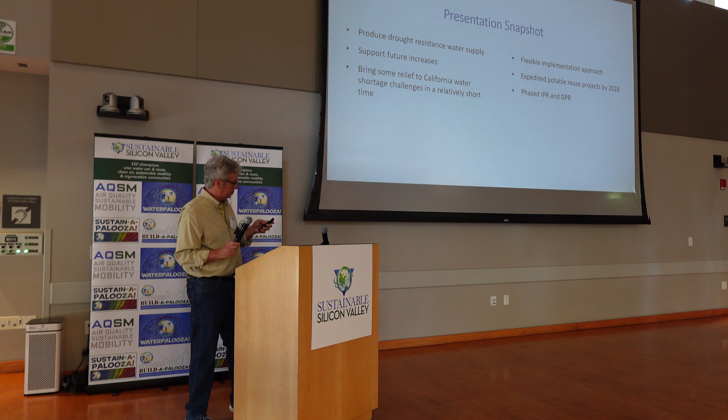Okay, so this is me. So we are Silicon Valley Clean Water. We are a joint powers authority, which is why I happen to have the title Authority Engineer—it's the chief engineer or district engineer, but we're not a district, we're an authority. So we are a JPA, and we do the wastewater conveyance and treatment for Belmont, San Carlos, Redwood City, and West Bay Sanitary District. They own and operate their own sewer systems. We collect the flow from the low point of their system, pump it to our treatment plant, and treat it for discharge into the bay or into recycled water for the city of Redwood City.

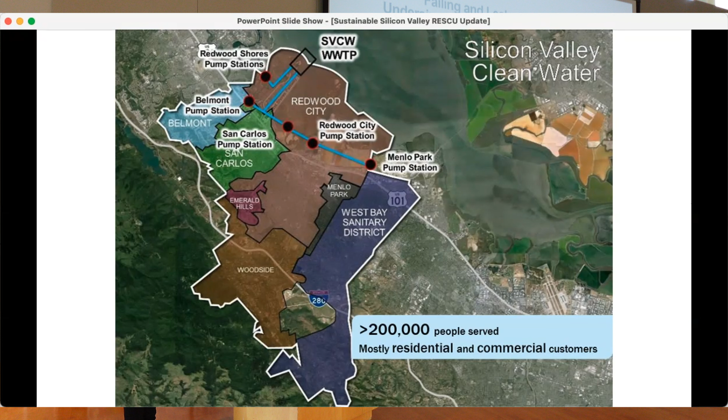So I'm here to talk about our conveyance system, and these pictures are of our failing force main. The force main, the pipeline that takes flow from each of our member agencies to our treatment plant, was built in the late 60s. We needed to operate it at a higher pressure than it was designed for in order to get the flow to our treatment plant, and we experienced several leaks in the system.

For a while it was cost effective to send operators out the entire length of our force main every other week, looking for evidence of a leak so that we could quickly address it. We would have two leaks a year in the 2000s.

It got to a point where we knew we needed to replace our force main, as well as upsize and replace our pump stations that pump the water to the treatment plant. So Dennis mentioned that putting pipes in the streets might be more difficult than convincing people to drink potable reuse, and that may be true, because it's disruptive, it's expensive, but it's a necessary part of life.

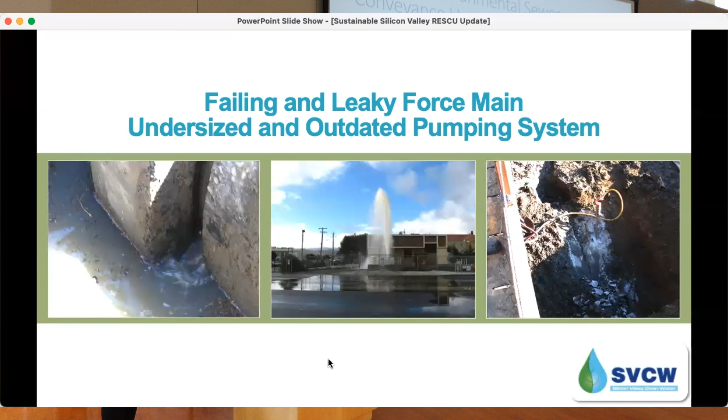So we underwent what we call our RESCU program—and every good capital improvement program has an acronym. We are Regional Environmental Sewer Conveyance Upgrade, RESCU. Ten years into the program, and I still have to look at the words to tell you what the acronym stands for, so it's written out there for my benefit as well.

So this is the extent of our conveyance system. We have one pump station for each of our 4 member agencies, and right now a force main that connects them all and brings flow out to our treatment plant at the end of Redwood Shores. In looking at this program, we split it into 3 separate projects. The first is our front of plant project, which includes a headworks and a lift station that can bring the flow up from underground to the surface for our treatment plant. The headworks is actually a typical process at a wastewater treatment plant.

It removes big materials, sand, grit, rags, baby wipes, lots of things that people flush that we'd rather they not, but basically protects the remainder of the wastewater treatment plant. Our treatment plant was designed without one, and since it's been in operation since the early 80s, we've operated without a headworks, but we're really looking forward to having a headworks in front of our plant.

The big project is our gravity pipeline project, and that's this green line. So what we did through our planning process was really look at all of the options for conveying water to our plant.

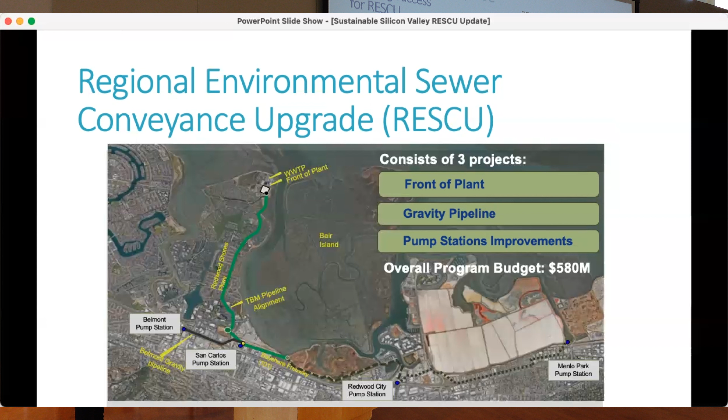So I want to just talk a few things about the program. At the beginning of this program, we set up some success factors under the categories of cost, operations, maintenance, safety, schedule, and stakeholders. Stakeholders was kind of a big category for the public, the environment, the regulatory community. And that was a really important key towards getting our minds straight, setting our North Star, figuring out how we were going to make our decisions as the program went on.

I also want to highlight that partially due to very good timing and partially due to very hard work by our finance department and the finance departments of our member agencies, we were able to take advantage of very low interest loans to be able to fund the majority of the program and reduce our financing costs on behalf of our member agencies.

Another thing that's different about our program is that we use progressive design build construction methods for our projects. That's a process where you bring the contractor on board during the design phase, very early in the design phase. They're involved during the completion of the design and then the construction project.

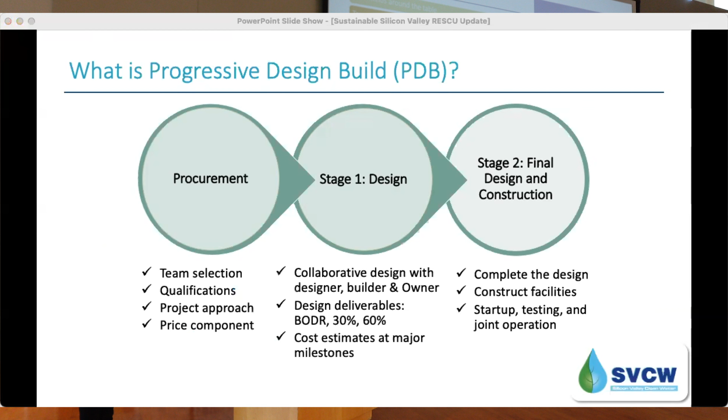We did that for a lot of reasons. For this program, first, there are so many smart contractors out there, so many good contractors out there that they get a set of plans and they go, I can't believe the engineers thought we could build it that way - let me tell you how we're going to build it. So to be able to have that input early in the design process, the input of both the contractors and the contractors' estimators, really helped our decision making in terms of how much the decisions we were trying to make were really going to cost us in the end.

This is a very transparent process, very good in complex projects, gives us cost certainty and schedule flexibility. There are a lot of good reasons that we chose that approach.

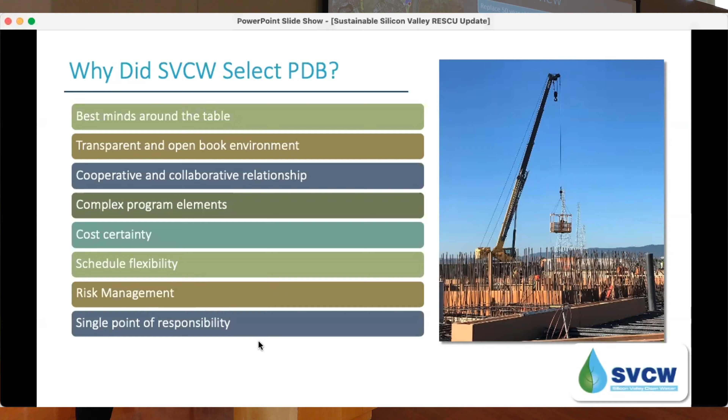So the stats are, it's about 3.2 miles of tunnel, 16-foot diameter, 16.5 foot diameter TBM. What we did was we launched it here from near San Carlos Airport and took a first pass this way towards Inner Bair Island. At the end of Inner Bair Island, we pulled it out, put it back in here, and then went the rest of the way down to the treatment plant.

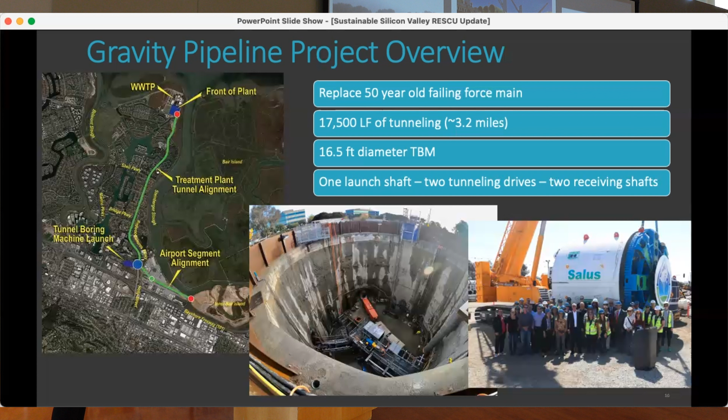Inside the pipeline is an FRP, fiberglass reinforced polymer pipeline that's 10 and 11 feet in diameter. It was manufactured in Indonesia and shipped over here, and placed inside the interior of the tunnel.

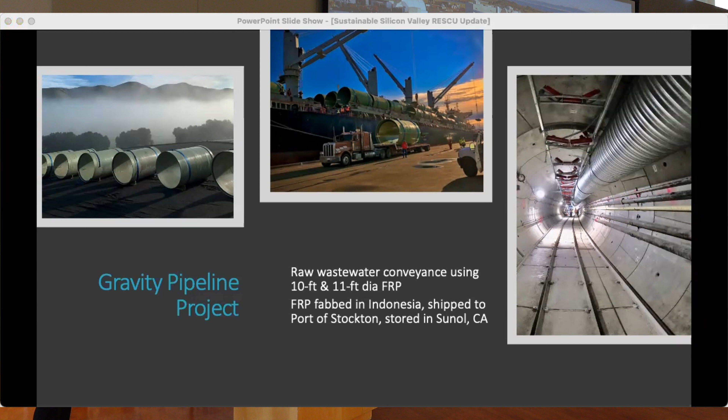Our front of plant project is a deep, large lift station that pulls the flow out of the deep tunnel and into our new headworks, which provides screening, grit removal, and an odor control process, becoming the first process of our treatment train.

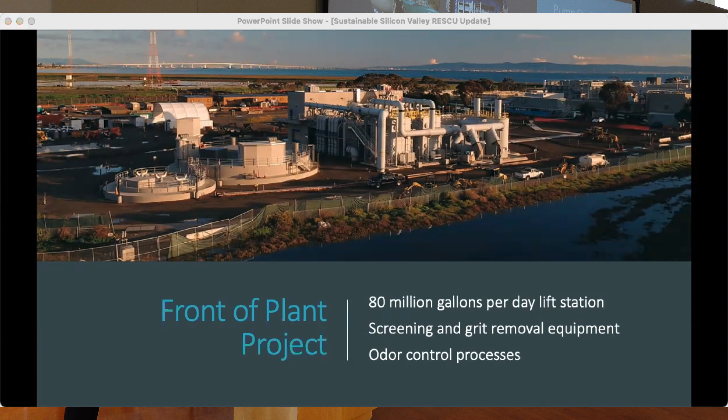Our pump stations improvements project involves rehabilitating the Menlo Park pump station. We're replacing the Redwood City pump station, constructing a new sewer, and that gives us the ability to demolish two of our existing pump stations.

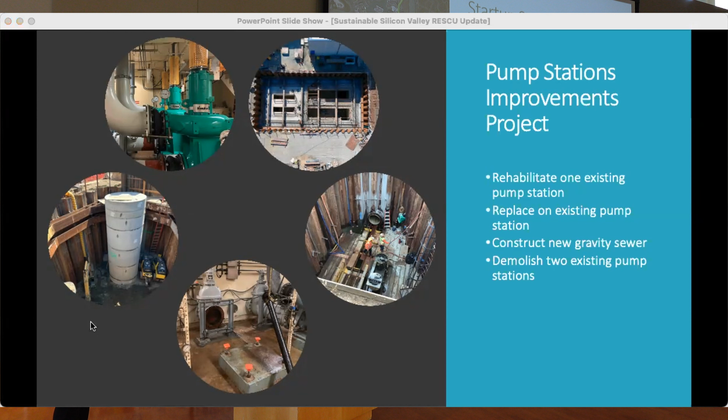As of last week, September 6th, we actually got water to flow in the tunnel for the first time. That was a huge milestone for us.

So we have flow going from this location through the tunnel to our treatment plant, which means we're also starting up our lift station and our headworks at the treatment plant.

We're in the middle of our 30-day test, putting it through its paces, working with the contractor to work out the kinks of operation of the system.

We still have a bit more work to do, but our pump stations improvements project is about a year out from completing. So we're close to the end of this 5-year construction program.

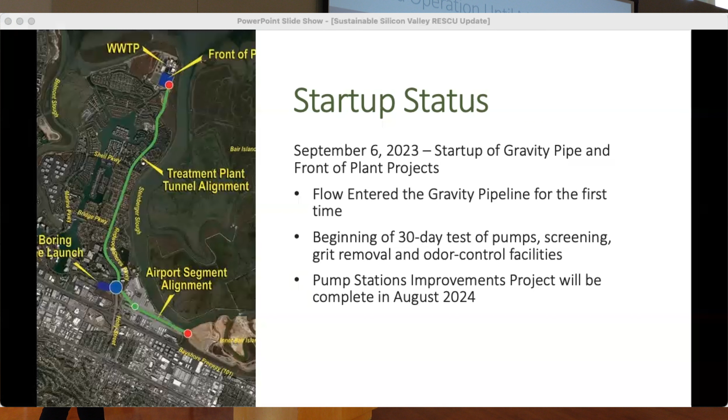Right now this is illustrating graphically the flows from West Bay Sanitary District and Redwood City, which previously went through our force main. This is depicting our force main, where San Carlos and Belmont flows connected, and then it would go to our treatment plant.

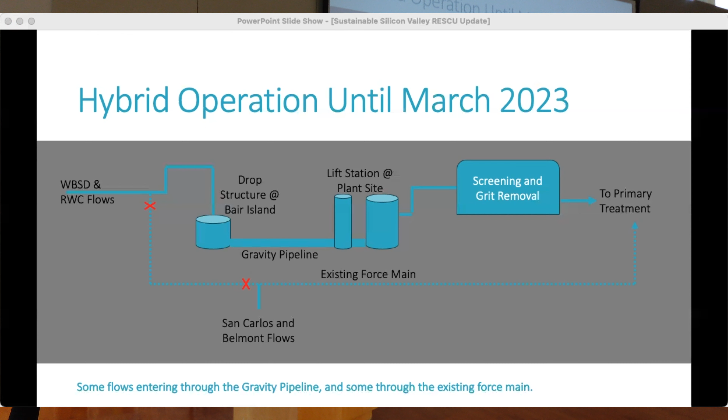So now our current operation is West Bay and Redwood City flows are going through our tunnel, through our lift station, through our headworks. San Carlos and Belmont flows are still going through our force main, so we're in a hybrid mode right now, but we'll be cutting over San Carlos and Belmont soon.

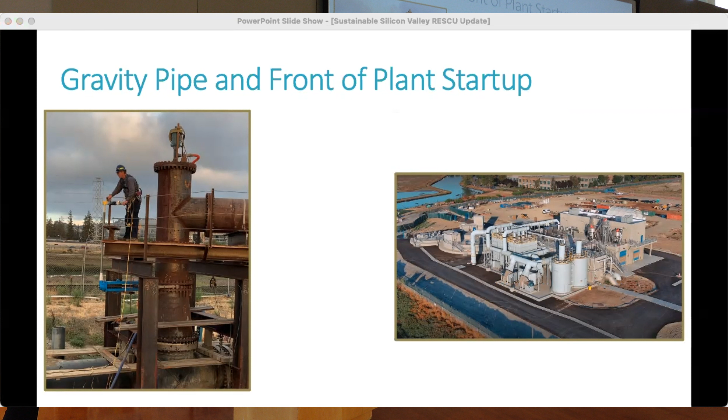These are some cool pictures. This was the operator out there operating the valve that was going to introduce flow into the tunnel for the first time. This is a picture of our headworks, which doesn't really have any dramatic pictures because it's all sealed up due to odors.

So there aren't great pictures, but I don't know if I can do it with this. There is a video. Oh shoot, now I did it. Okay, there is a video that maybe we need to go to the computer to click, or maybe we can just skip it. It was very exciting for me.

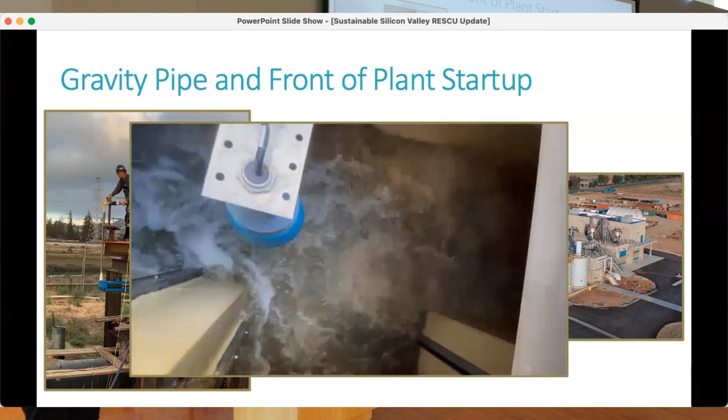It's the flow entering the headworks. It's probably not as exciting for the rest of you, but there it is. We had to open a hatch to get the video because everything is under wraps and under decking, but it was a big moment for us.

Thank you, Dennis. Thank you.

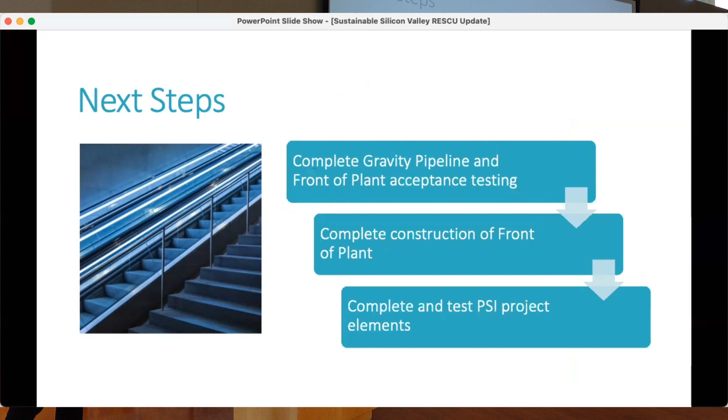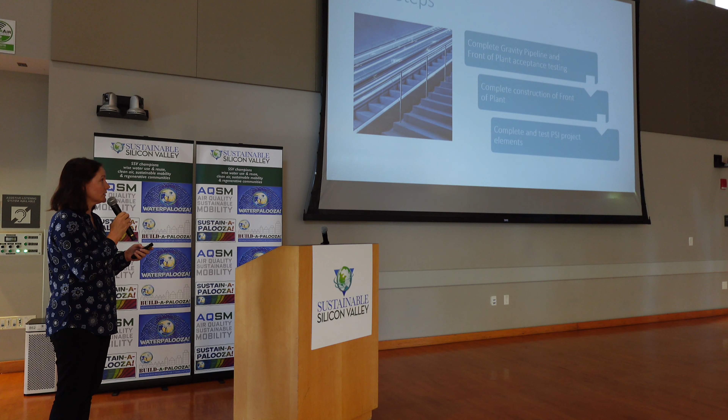So next steps are we're going to complete our gravity pipeline project, finish our acceptance testing for our front of plant project, complete some last construction elements of the front of plant project, and complete and test our pump stations improvements project over the next year. And that's what I had.

Happy to take questions.

Yes, hi. So when you're rebuilding all the pipes and restoring the infrastructure, was potential impacts from climate change being taken into account? The question was about impacts to climate change.

Yes, they were. Throughout our CIP projects, we have been replacing equipment with more efficient equipment. We've been looking at ways we can utilize the wastewater process, which actually produces methane, so we've been putting a lot of projects into being able to utilize that methane and create energy sources for ourselves rather than just having to flare it. So every element of our program, we are looking at how we can become more energy efficient.

And then there are the effects of climate change on our infrastructure, as opposed to the other way, that have to be taken into account as well, flooding risks, et cetera.

Great presentation. Oh, thanks. Mehdi Sinaki with Valley Water.

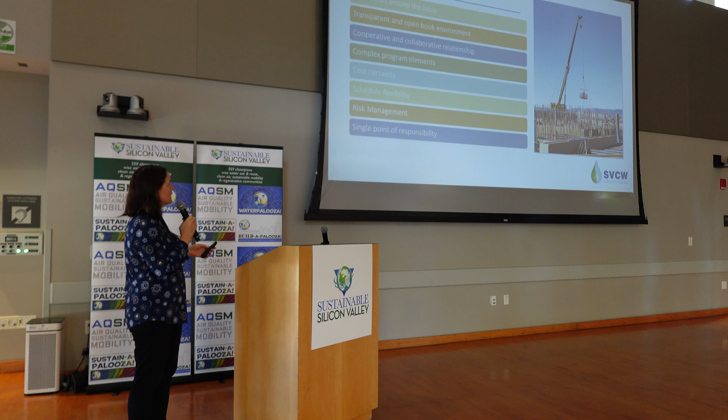The WIFIA program only allows us to fund about half of the program. We got two separate loans, 207 and then an additional 69 a couple years later, which adds up to about half. So you're only allowed to fund about 49% of your construction project through WIFIA. The State Revolving Fund has the lowest rates, but they're also limited in how much they can give out. So it was as much SRF money as we could get, plus WIFIA as the majority of it. Some of the infrastructure was funded through cash as well as some bond proceeds.

Quick follow-up, was the SRF through CW SRF? Yes.

Well, thank you, Kim. All right, very good. Actually,

So with the RESCU program hitting these milestones, what are you looking at? You certainly still have a lot of projects going on. Yeah, we have a lot of projects going on. We still have a bit of rehabilitation of our existing processes. We're also looking forward at nutrient removal. Right now we don't have any processes that remove nitrogen and ammonia from our wastewater, and we're working closely with the regional board to plan for the projects that will ultimately provide that nutrient removal.